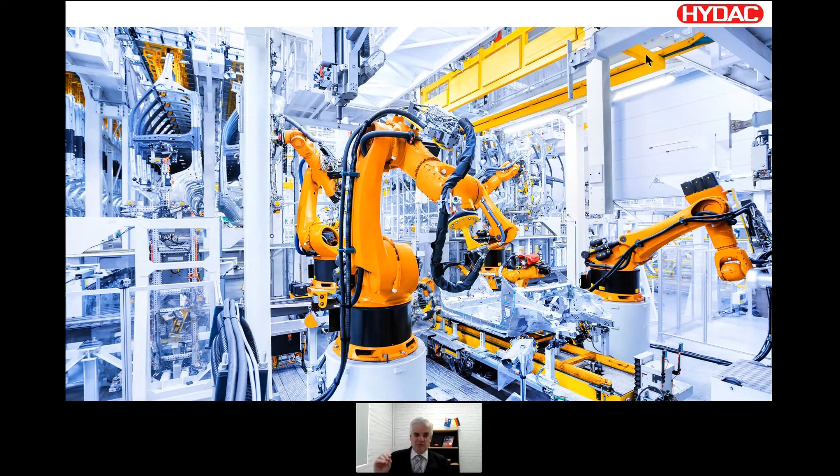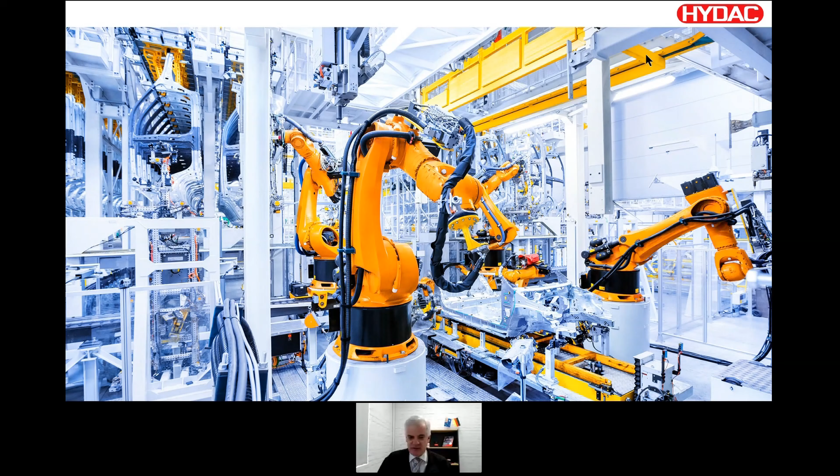If you concentrate on the factory of the future as your discussion point with Industry 4, you're going to potentially miss a lot of opportunities, certainly in Australia. The difference with Australian industries is that they are very mobile. We do have industrial applications, but mobile is very different.

One of the things that defines an industrial process is that it's repeatable. That's what gives you repeatable products and good quality. A machine cycle is usually going to be the same, so it's easy to track, easy to log, and quite predictable. That's a desirable state, predictability.

Mobile equipment is very different because it's not as repeatable, and it does change - in severity of operation and in the environment it's working in. It's very different and not at all repeatable. From a predictive maintenance perspective, it's more difficult to analyze the data there. It can be done, but you have to work more at the analytics side of it.

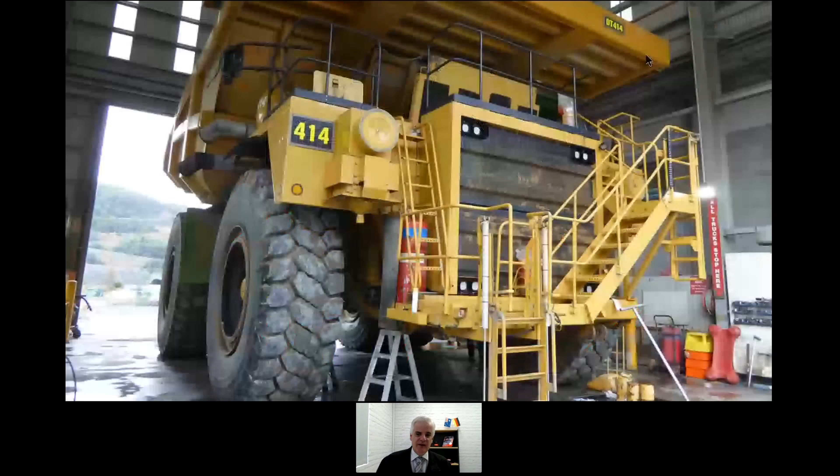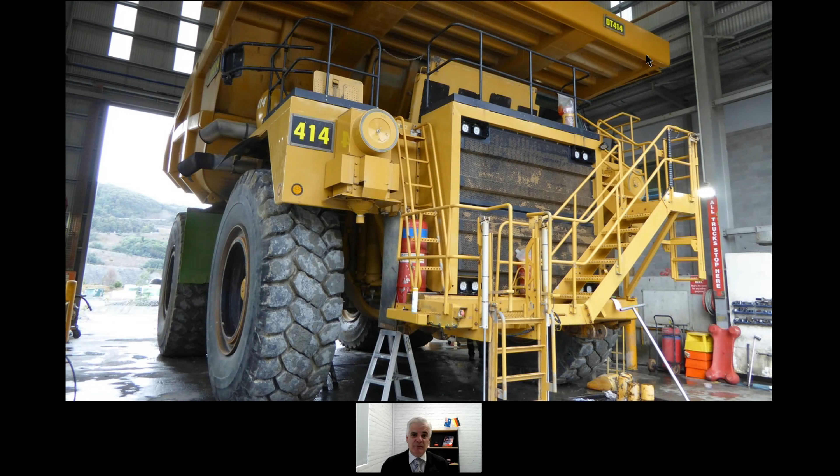The Australian experience is pretty much that we have mobile equipment, and here's an example of how Industry 4 can be applied - this is a haul truck from a mine. These have been part of our industrial landscape here for many years, and will be for a long time. You may or may not be aware that these haul trucks are being automated in many sites in Australia, so with automation, basically they are completely autonomous.

They're essentially robots, and these robots are very different to the ones in the factory of the future. If you think a self-driving car is pretty awesome technology, this is that on steroids - this is everything that modern technology can bring to bear.

The reason they're automating these things is because there are quite a few distinct advantages. One is that the rate of incidents and accidents occurring is much reduced if you take away driver error and driver fatigue. Basically, a computer acts as a watchdog driving these things - it's self-aware of where it is, sometimes even more than a person can be.

There's been incidents where these can have vehicle-to-vehicle interactions, and incidents where they can have vehicle-to-wall interactions in mines, with berms and so on. The robots are a lot more aware of their environment, aware of their location, and they do not respond in an unpredictable way - so they're actually more predictable than people. That's seen as an increase in safety, and an increase in the hauling capacity and overall effectiveness of these things.

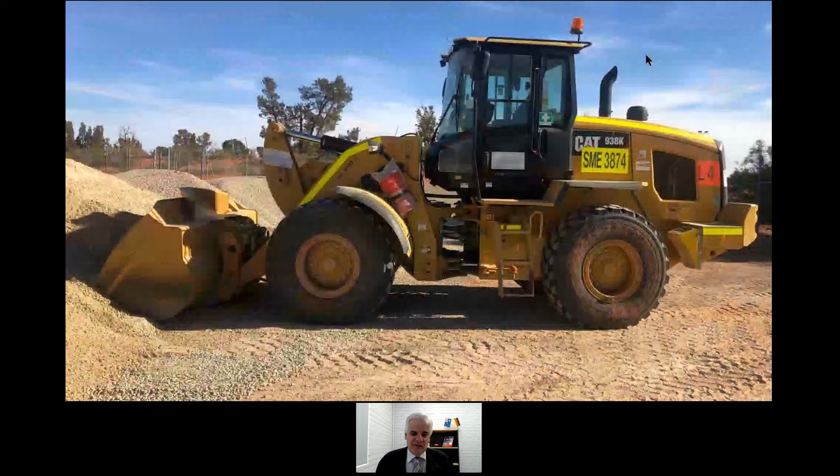It's not just the large equipment - if you can automate the haul trucks, you can automate anything. I just thought I'd show you a few slides, examples of the sort of mobile equipment I'm talking about.

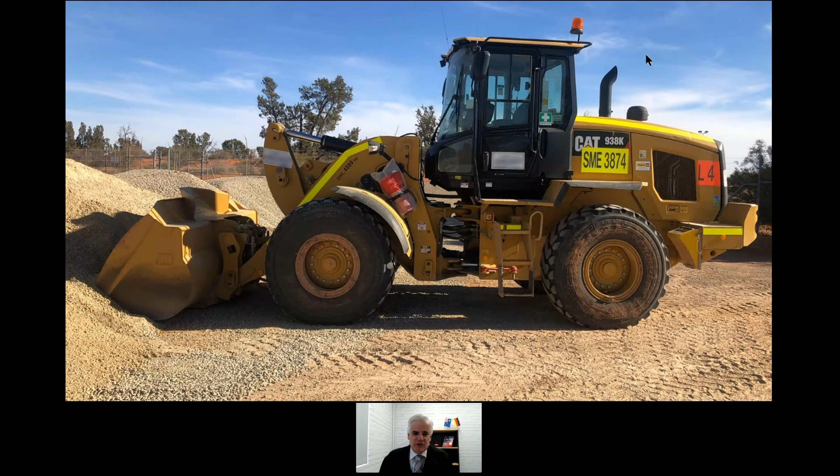What's interesting from my perspective as a trainer is most of these machines have a fair bit of hydraulics on them, so hydraulics is very much part of industry. This is a loader often used in civil construction and mining, and of course, just a general purpose digger there.

If you think of a tractor, you often think these things just have a steering wheel and a few levers to move things. But tractors have changed as much as cars have in the last 20 or 25 years. You get in a car now and very often you'll have a digital dashboard, very often no gear stick anymore since it's automatic, and very often things like GPS location. Even if you don't have a self-driving car, you may have one with adaptive cruise control that can come to a stop if it sees a person on the road.

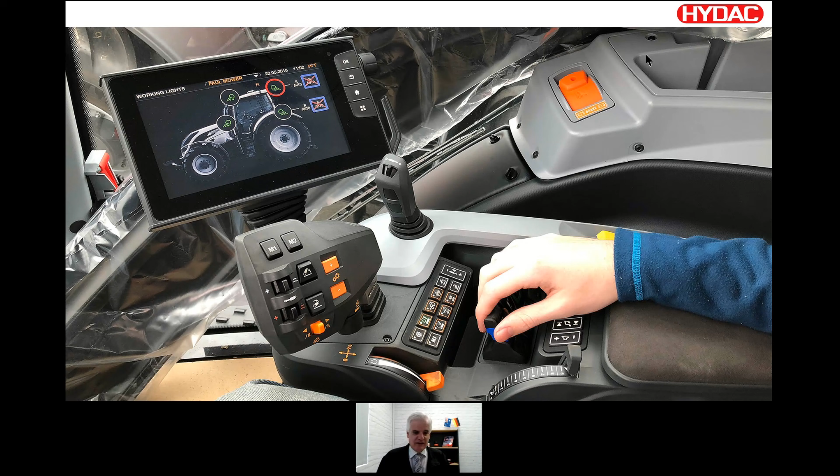All of these technologies developed for the automotive market are moving away from just being employed in cars and into trucks, tractors, and large equipment. The interaction with these is done via digital touch screens, and these tractors are getting connected to the web with much more commonality.

In a lot of cases, these machines are running on a CanBus. A CanBus is a digital communication protocol - a controller area network. Essentially it's a digital protocol, zeros and ones flying around, with all the controllers and actuators basically communicating with each other via digital communication.

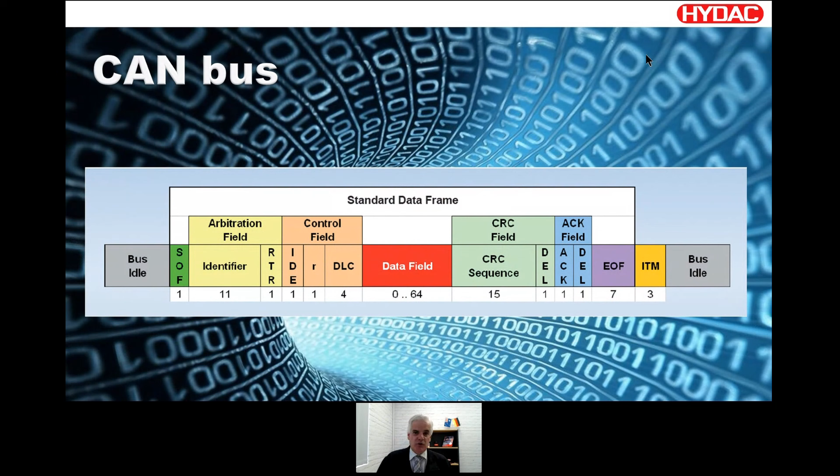This is just a look here at what the protocol is and how it works - I'm not going to go into that, that's really not what this is about. But with CAN bus, it is very digital already, and that makes it very easy to integrate with further technology and sending data off board.

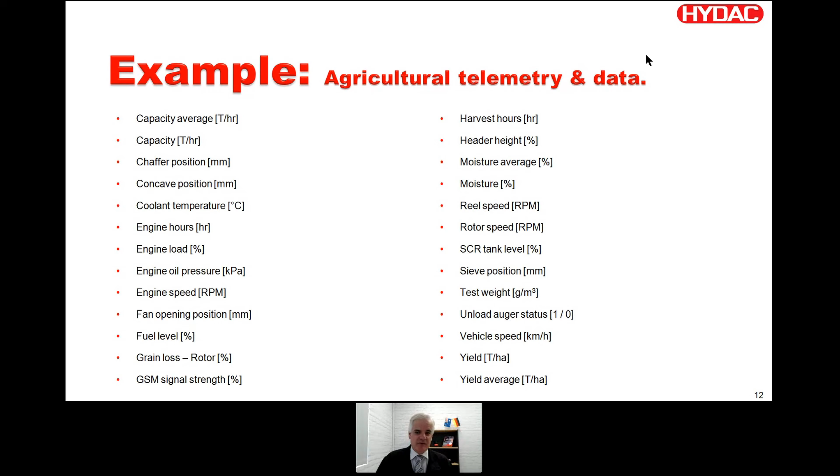Okay, it's not a factory of the future. It's not a factory at all, but that doesn't mean it can't be connected. So that's an example of what can be done - the connectivity of this equipment is a pretty simple thing to do.

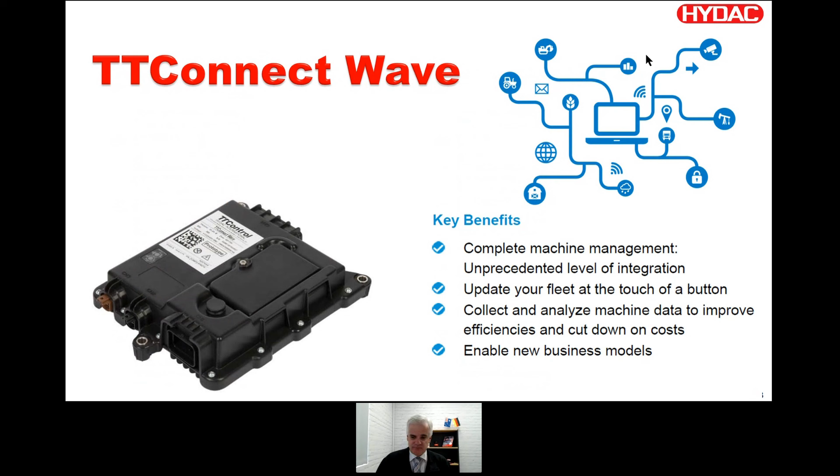I just thought I'd highlight one of the products that we have, called the TTConnect Wave. The TTConnect Wave is basically a CAN bus enabled device, and it simply listens to the CAN bus and sends the selected data that you tell it to wherever - either over its own wireless network, or via GSM or Wi-Fi to the web. So it's used to gather data and send it away for analysis.

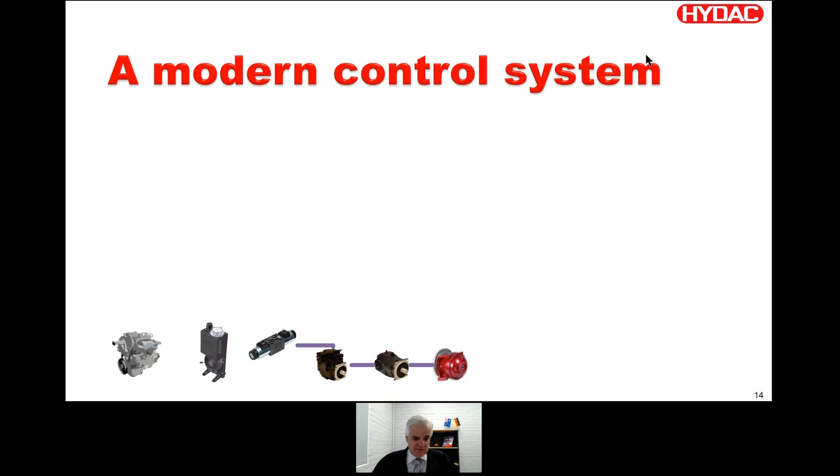A modern control system can easily be adapted into one of these. Without going into a specific application - and I'm being aware that some of the stuff we're doing here I don't want to talk about specifically - but in general terms, a lot of this equipment will have a control system overseeing the valving, actuators, and pumps, commanding the system essentially, and also talking to the engine management via a CAN J1939 signal.

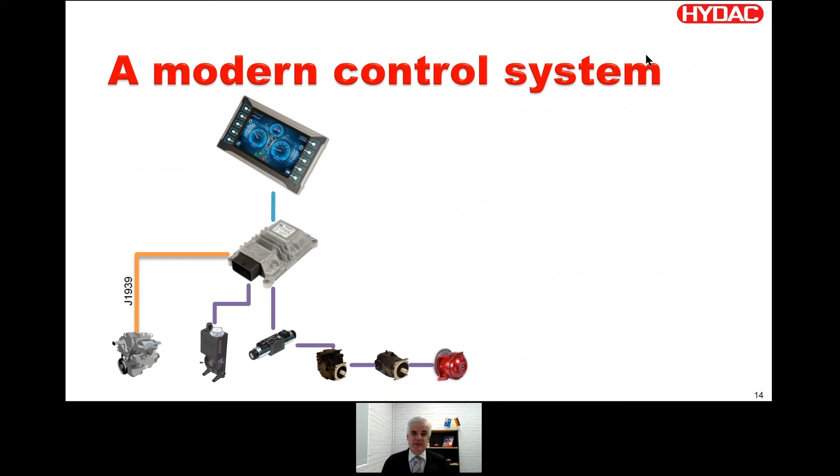These are modern controllers, and essentially they're programmed. They will talk via CAN bus to an HMI, a human machine interface. The HMI becomes, in many cases, the dashboard, bringing real data about what that vehicle is doing at any time - essentially the same as a digital dashboard on a car. That can also have an interaction with another piece of equipment.

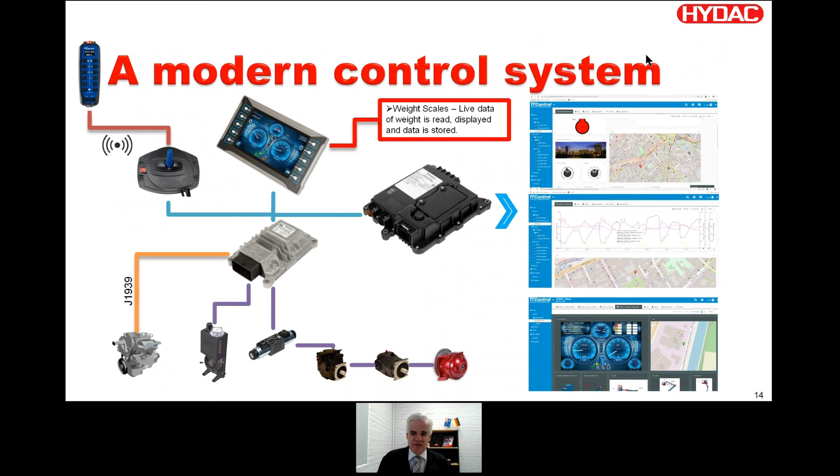Say, for example, we have an application that requires a wireless controller, so somebody can walk around the truck and operate it without being inside. The Wi-Fi can talk to CAN bus, and that's displayed on the HMI. So we can look at things such as weight scales for construction equipment. Live data of weight carried can be read, displayed, and stored. The TTConnect Wave can then send that information to the cloud, where it can be accessed anywhere, tailored to the people who want to use it, so each person sees what's important to them.

These are technologies we're employing right now with great success. I just thought I'd highlight this.

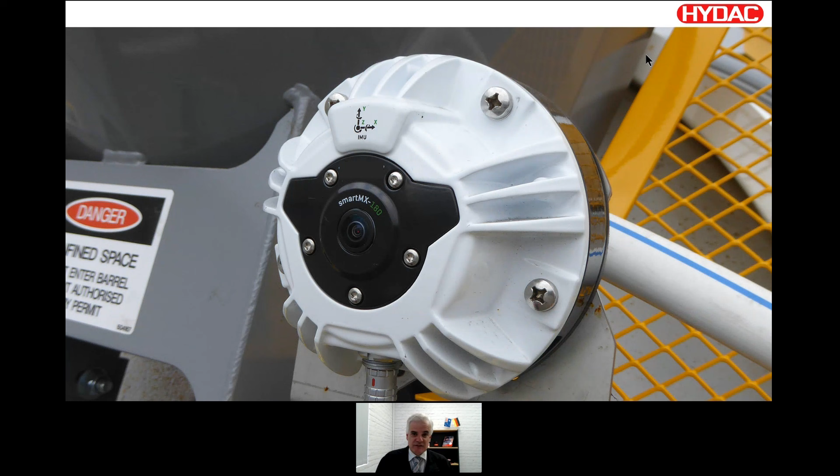This is one of the nicest things I've seen. This is a little camera that's been deployed on this truck in various locations, and it's actually an Australian product. This camera on the truck can be used for safety, for example as a reversing camera. In the same way you'd put this on a car, you can put it on a construction vehicle, and it can also look forward as a dash cam.

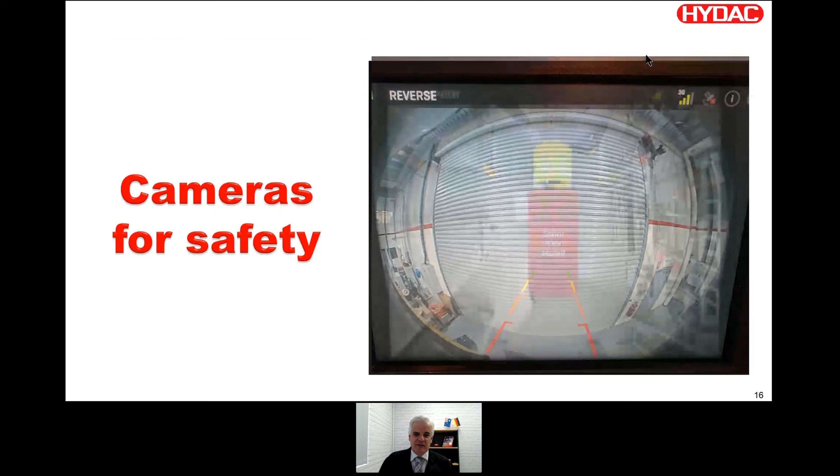That way you can get data on what's actually happened. If there's a vehicle incident, you can tell if it was driver error, or find out who was to blame if it wasn't. That information can be sent remotely as well.

This is one of the nicest things I've seen, quite amazing actually. In this case, we've taken a drone image of the top of the truck, which had about 6 cameras around its perimeter, looking forward, backward, and sideways. The software was able to stitch that together as a top-down image in real time.

We've seen this top-down view technology on high-class luxury cars, but it can certainly be used in an industrial context. The big advantage is you can see anyone walking around the truck. There's clear evidence that people have demonstrated they can bring safety incidents, person-to-vehicle incidents on construction sites, down to a functional zero injuries. The driver becomes much more aware of everything happening around them.

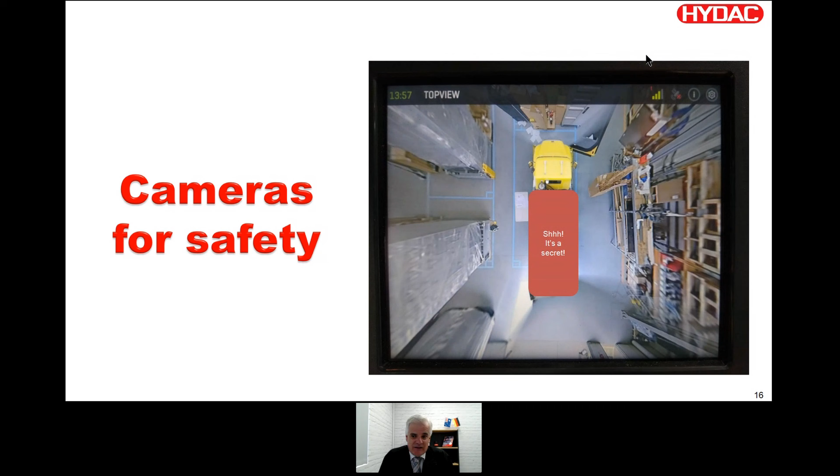So again, very different from an automated factory of the future, but certainly high tech, new, and very innovative.

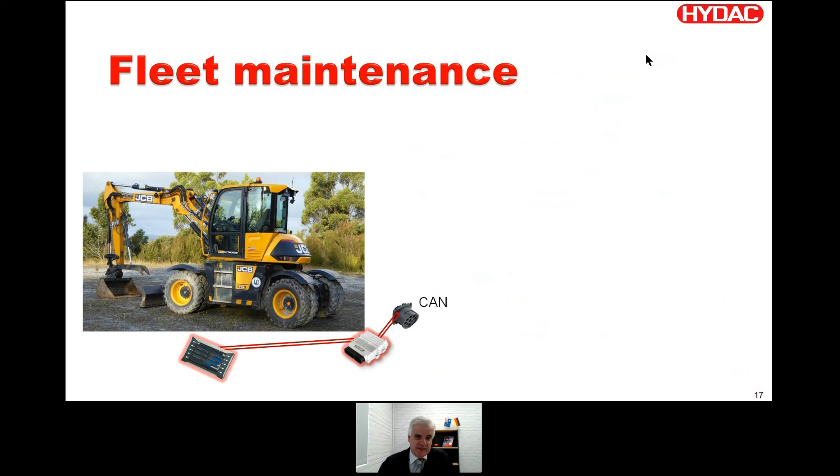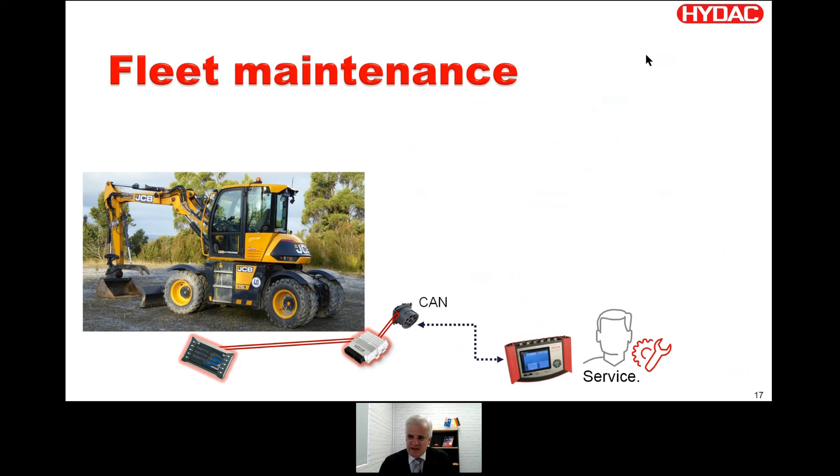Further to that, with fleet maintenance you can grab a piece of equipment, and again we have the HMI and controller, which can send information to a CAN bus. That information can be accessed with certain tools for service, so service technicians can get access to everything happening to help troubleshoot the system. Just like a modern car can be hooked up to a computer in a workshop for diagnostics, the same happens with these machines.

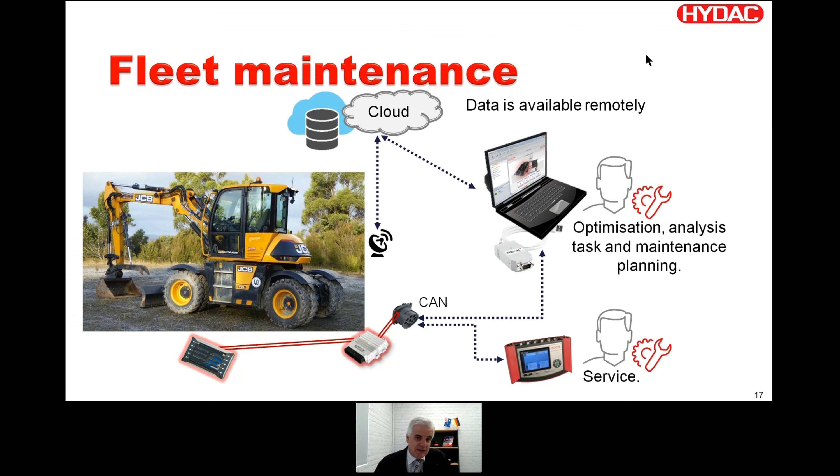From a service perspective, the same data can be used for optimization, analysis of how the machine's working, task optimization, predictive maintenance, and maintenance planning. All of this information is turned into data that can be accessed anywhere for any function, and sent to the cloud for remote access and analytics. So if you can imagine that data being of interest to you, it most likely is, and it can be done now, and is being done now.

If you can have a look at some mobile assets and look at getting that information into the cloud and doing information analytics with it. Certainly it doesn't just have to be a piece of mobile equipment. It can be anything at all, so a fleet of devices.

For example, we've got some applications where we're employing exactly the same technologies in use with building services. It's not just about the machine, or an articulated machine. It's about connectivity - I want to know what that thing is doing, how it's functioning, and if we can collect information on that, we can look at how to optimize it and develop more efficient products and maintenance schedules.

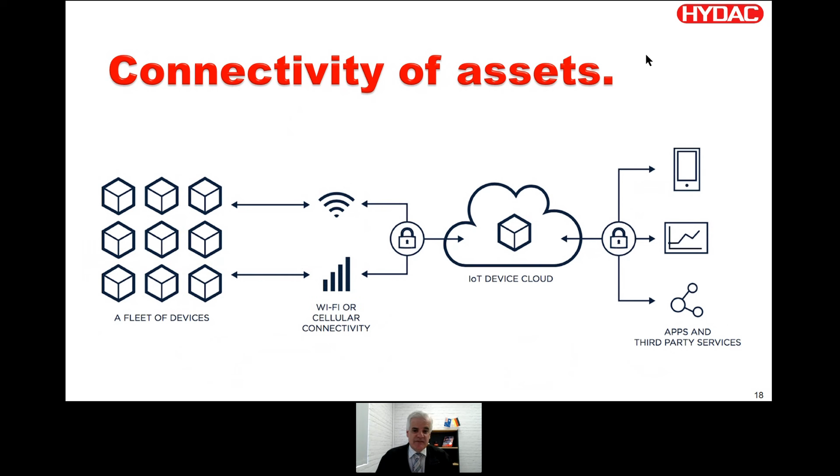So certainly it's about connectivity, and the asset doesn't have to be any industrial equipment - it can be domestic as well, it's still the same connectivity. Managed IoT solutions, that's the Internet of Things. Essentially we can get information from a number of sensors, analyze it remotely, collect information on that, and there are many options available to us and the wider market.

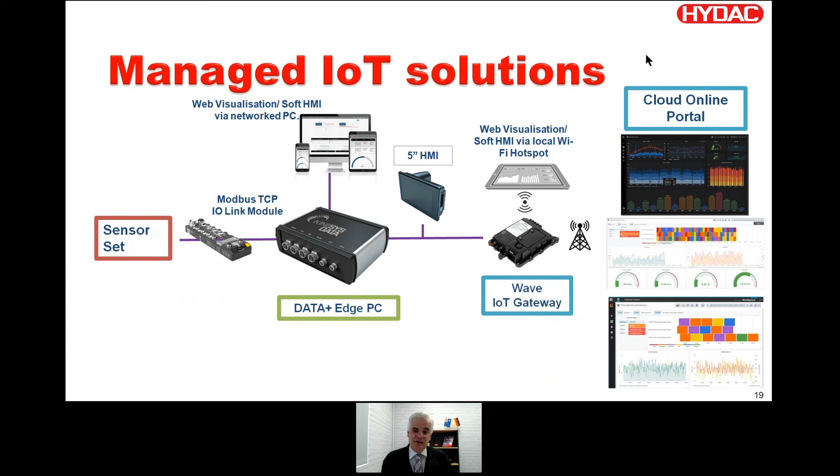Connectivity is really the Industry 4.0. In the Australian experience, it's about connectivity - it's about the data and the connectivity. So data analytics - I've read an article recently where someone was saying that in the 20th century the most important resource was oil, it defined the 20th century, and the most important resource for the 21st century is data. Big words - I'd still suggest oil's pretty important.

We still need machines and they're still going to need to be lubricated, but certainly data is the thing everyone's interested in - that's a bit of a catch cry at the moment. So if you don't have sensors on your thing, you're not going to get any data. If you don't have connectivity, you're not going to have any useful data. So with data analytics, there are really four levels to what you can do with the data.

Just as a few final points - descriptive analytics is the analytics of what that machine or unit is doing now. Tell me what you're doing, I want to see live data - that's descriptive analytics. A level above that is predictive analytics.

This is again what we talked about in our last session. Predictive analytics is: we know what the trend has been in the past, we know what the current condition is now, and we want to have a look at projecting that into the future - finding out about optimizing planned shutdowns and so on of that equipment. That's a level above descriptive analytics.